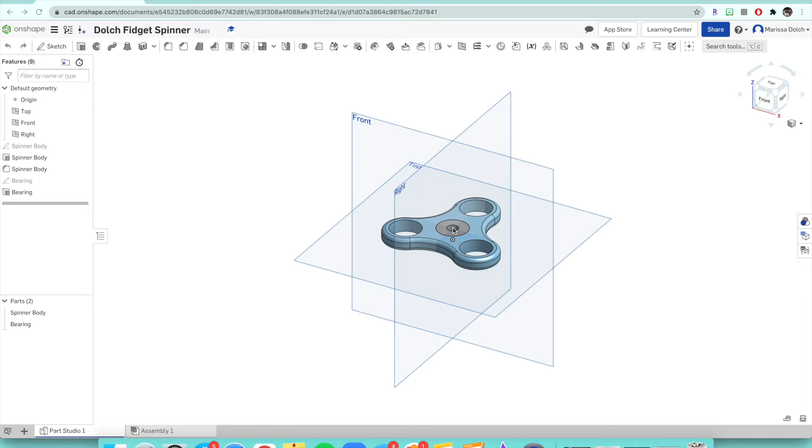So in this video, we are going to make the caps for our fidget spinner. So please make sure if you're coming onto this video that your spinner looks like mine, so you're ready to go to make that cap. So these caps go on top of the bearings through that little hole right there for your fingers to hold on to, right? That's how it spins around in a circle.

You hold on to the top of the cap and it spins because the inside rotates on that bearing right there. So right now we're just going to make one, kind of like how we made our one bearing, because once we get to the other part, to the assembly, we'll just add in another one for the other side of this spinner. So what we're going to do is we got to start with our sketch, right? So same thing as usual.

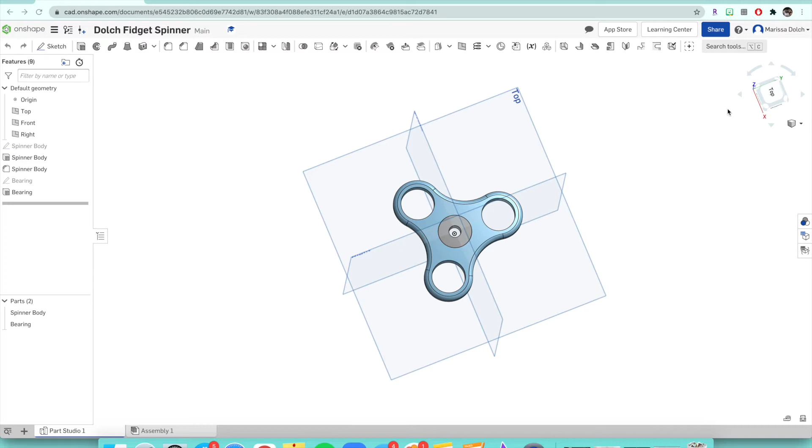We're going to go to the top view. Now you're not going to click add sketch to top view yet. What I want you to do is click on the top of the bearing that we made. So that donut should light up. And that's what we're going to make our sketch on. You know if you clicked it correctly if, after you click on that donut and it lights up and you click sketch, it should say face of bearing, right?

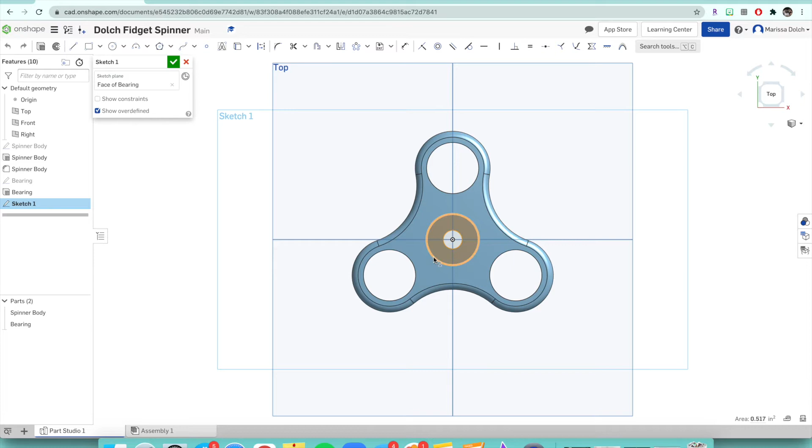So that's why we named everything, so we could make sure everything is how it's supposed to be. So that is where we're making our sketch, on top of the bearing, because the cap goes on top. So we're going to zoom into our bearing here so we can see it a little bit better. And we're going to do the same thing like we did with the bearing. We're going to make two circles.

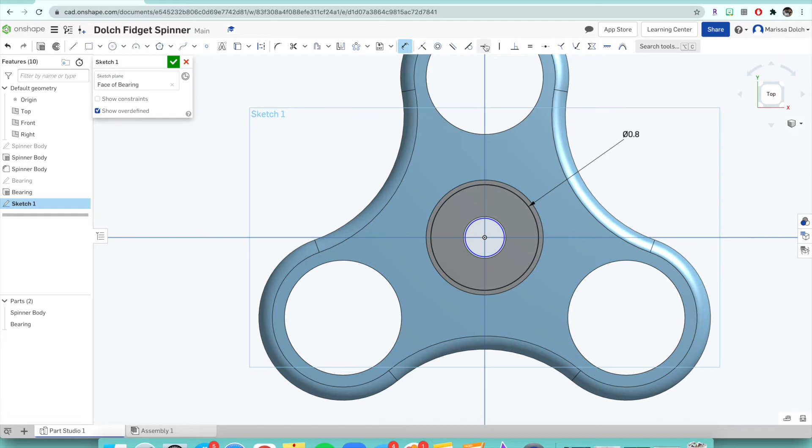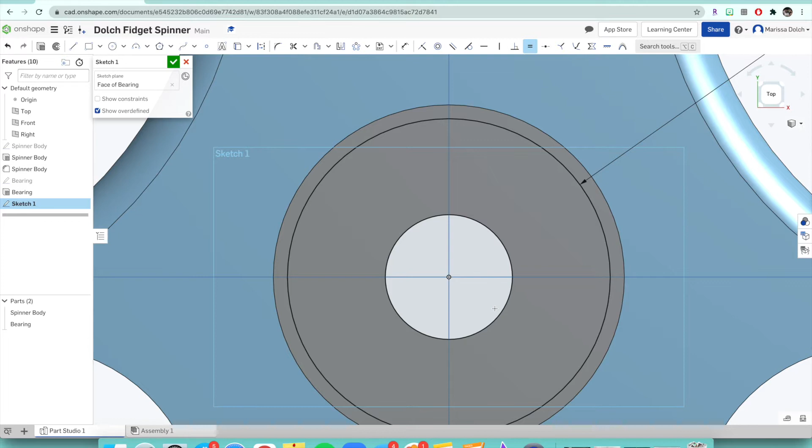We're going to make one circle snap in the center on the outside, another one on the inside, and we're going to change the dimensions of the outer circle to 0.8. So it looks like that. Then for the inner circle, we're going to make that one equal to the black circle of the bearing, right? So that inner bearing circle, we're going to make that equal to our blue circle. All right, so it should disappear because we want it to fit in snugly. So we need to make sure that it vanishes and it looks like this.

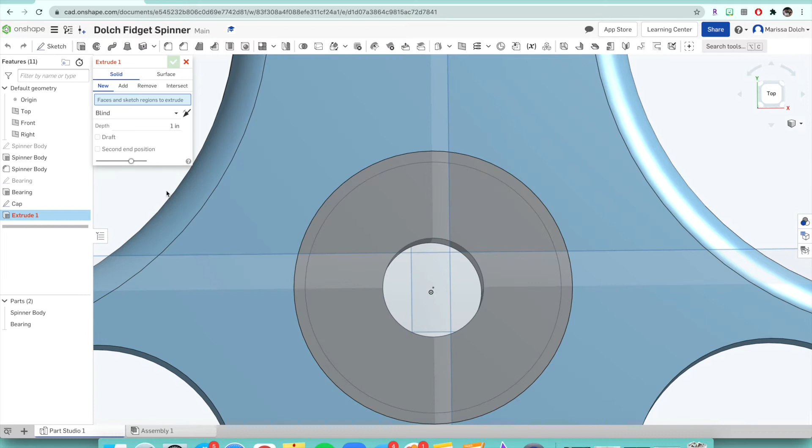So there we go, we have our drawing for our cap, and we're just going to rename this to cap so we know, and we can click that check mark and we're good to go. Then we're going to click the extrude button. So we want to make this 3D. Now, for this extrusion, you want to select the entire cap. I know before we just clicked the donut, right? And we didn't click inside, but now we want this whole entire thing to be solid. So you're also going to click in the middle of that cap there.

And you can see now that it's a solid piece extruding out. So again, we don't want it to look like this. We want to also click in the center of the hole to cover and have a full piece of material that's solid. So now it defaults to add again, right? But like the bearing, we want this as a separate piece. We want this as a new part. So we're going to click new, and it'll change it to a dark blue color. If you don't change it to new, it'll stay gray.

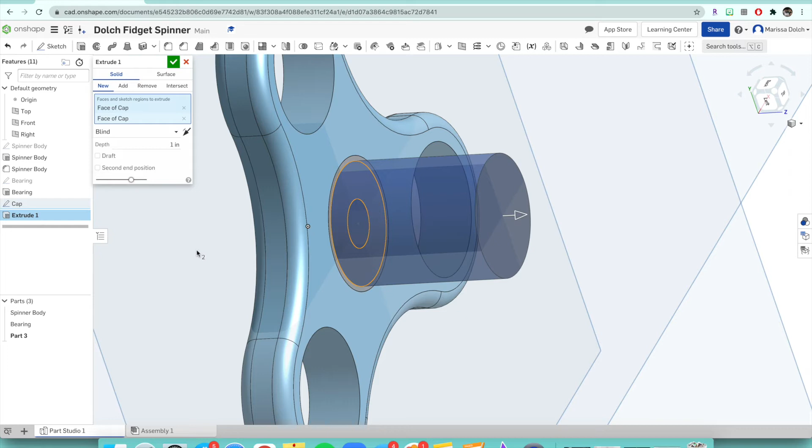We want it to be added on top of that bearing, so that is why we're making it a new part. So now this is sticking out fairly far out of this fidget spinner, so we want to definitely bring that height down, and we're going to bring it down to 0.12. Alright, so that is significantly better, a comfortable height for your finger there. So now we're going to rename this to cap 1 because we have to do 2 extrusions. The first one that we just did was the cap itself, the top part, and the next one we're going to do is the peg.

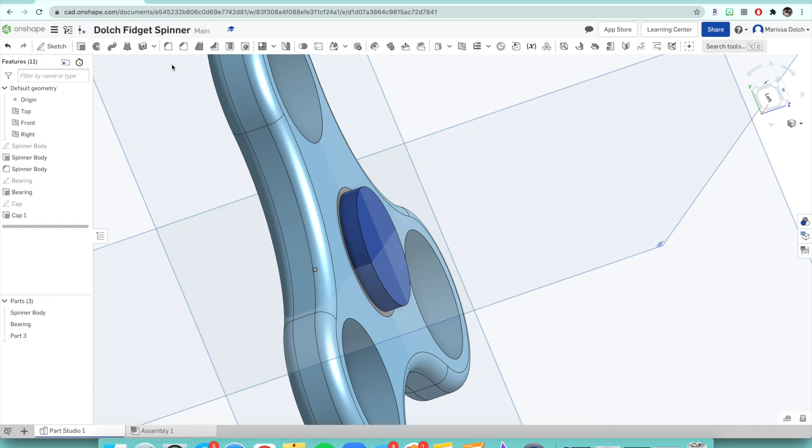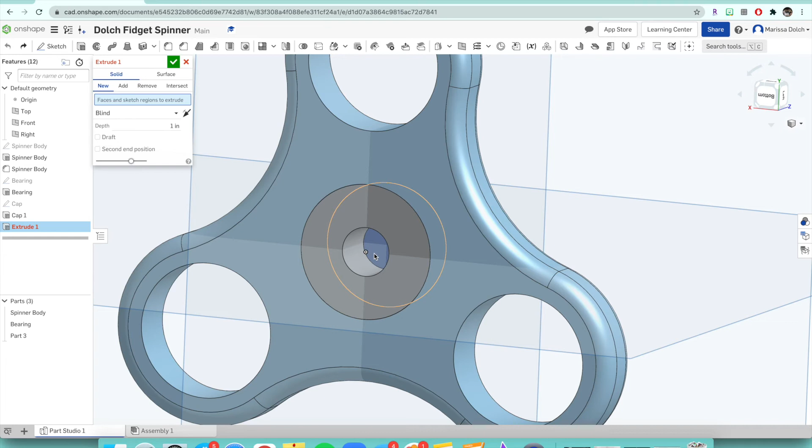So we're going to name this one cap 1, and now we have to make the peg into a different extrusion, because if we did the peg right now, it wouldn't work. It wouldn't add it in the correct spot, so now we have to do another extrusion for the peg that goes onto the inside of the bearing. So we're going to click extrude again. And now, of course, we're just going to click this right here. Oh, that doesn't really work because we want this dark blue dot and I can't really click on it. It just keeps doing that.

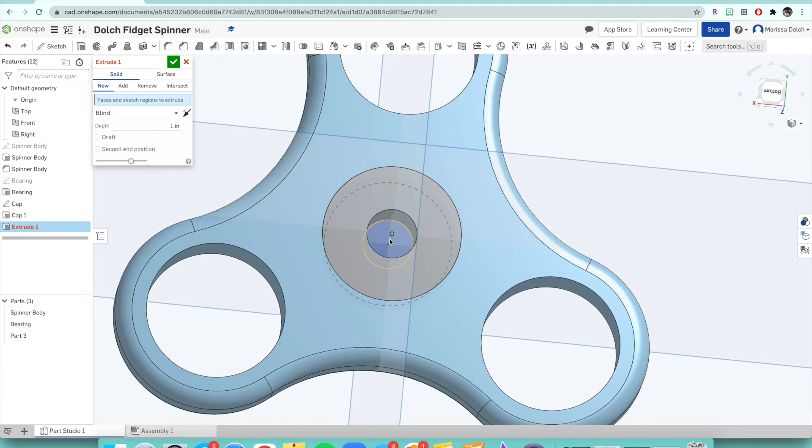So what we have to do to get that blue dot to come out and extrude inwards towards our bearing: right now you'll see on the left side, it says cap, and it's in a light gray color, because right now it's hidden. So we want to click on that eye so we can see it. And now you can click on that blue part and it'll come out, but it's coming out the wrong way. So we definitely have to fix that.

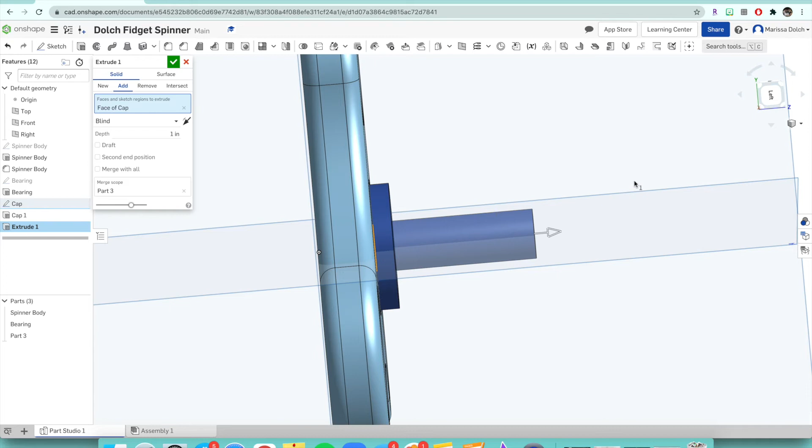To fix that, we just have to change the direction of the arrows. Right now, it's going outside on the top. I want it to go to the bottom, so we're going to click that arrow and it'll go the other way. Now, oh my god, right now it's red, right? Which is kind of scary, but don't worry. We're going to change the depth and it'll fix itself.

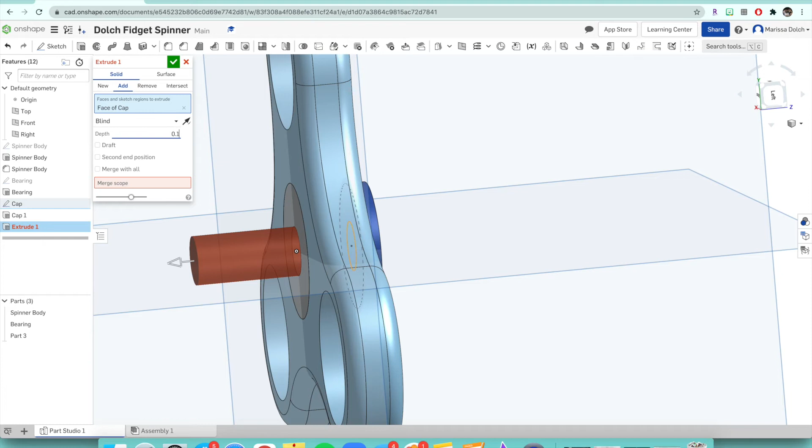So we're going to change this depth to 0.175, click enter, and now it's not red anymore. And it's going halfway through, which you can't really see right now. I'll show you in a couple minutes, but it's going to go halfway through that bearing, so we can put another one on the other side later.

So now the only thing that we want to do is, you'll see here it says new, right? Because that's how we had it for the top of our cap, which we don't want. We want to make it add, because we're adding this as another piece to our cap. Our cap's a whole piece, the peg is not separate. We want the peg to be attached to the top of the cap. So you want to make sure, this is very important, to change it to add before you click anything.

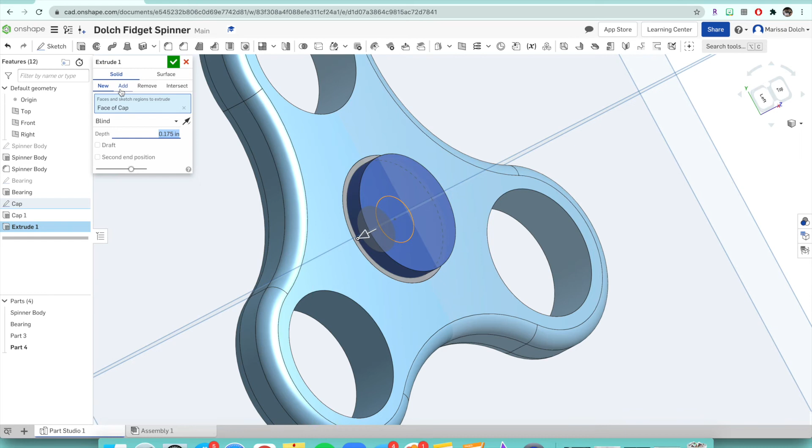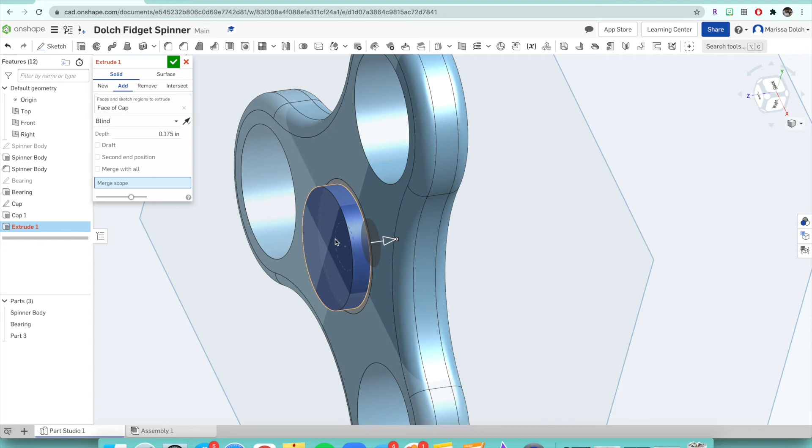Right now it's red again, you'll see our dot is red, kind of concerning, but all that it wants to know is what are you adding it to? What are you adding this peg to? And we're adding it to part 3, which is our cap. Now you can see it also turns blue, it went to part 3. And you can just click the check mark, which I forgot.

We also want to name this, so you just double click, rename, and I'm going to call this cap 2, to distinguish. All right, and it kind of looks like that.

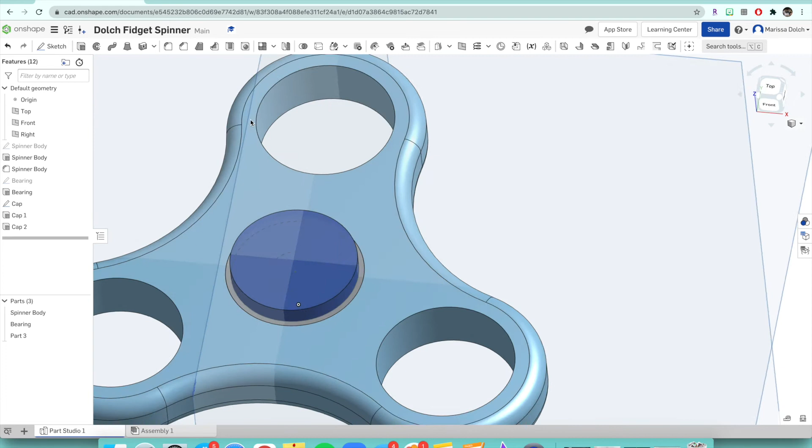Now we want to go back and hide that cap sketch again, since we unhid it to do that extrusion. So we're just going to hide that. And now, let me hide the spinner body and the bearing here.

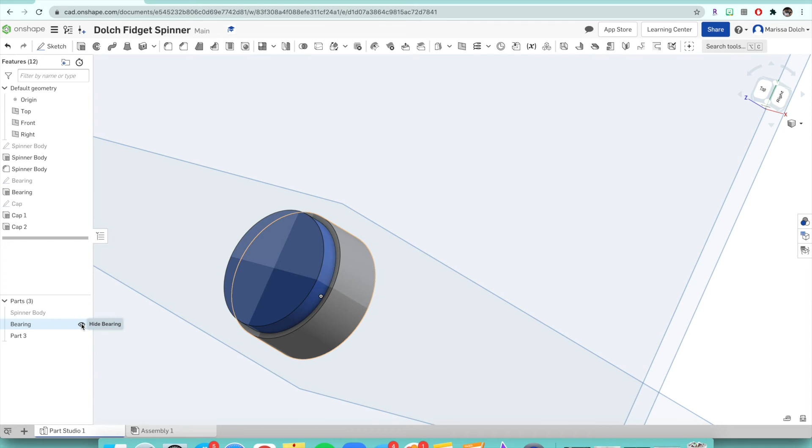So now you could see that part 3, which we'll rename in a second, the peg is going through that bearing halfway. Right, so we did exactly what we were supposed to do.

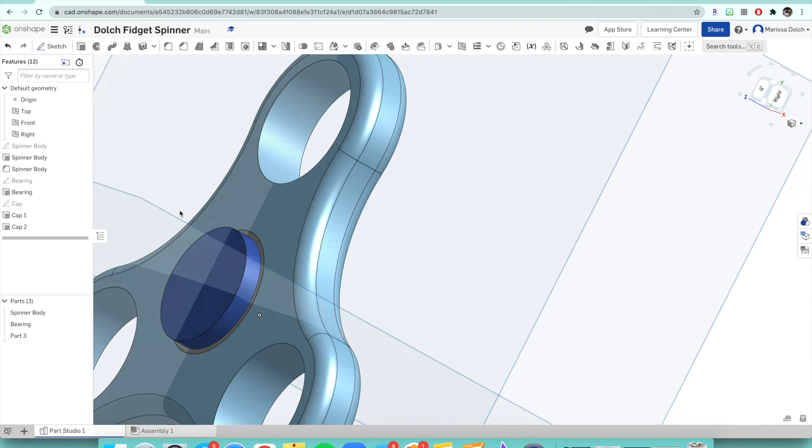So now I'm gonna show all the rest here. And now if we look at the top of the spinner, it's kind of, like I said, even with the body of the spinner, it's rough, right? It's rigid. We want to make sure that when our skin's touching this, it's safe for us to touch and it's comfortable.

So we're going to chamfer this edge to give it a nice smooth edge. So what we're going to do is click on our chamfer button, which is next to the fillet, and we're gonna just click on that edge. Right now, as soon as I clicked on it, it went a little too much, so we're gonna back this up a bit and make it 0.1, click enter, and now it looks pretty good. It definitely looks more like a fidget spinner.

So there is the final product here. So now what we're going to do down here is, we have everything named except part 3, so we got to rename that. So we're going to rename this to cap.

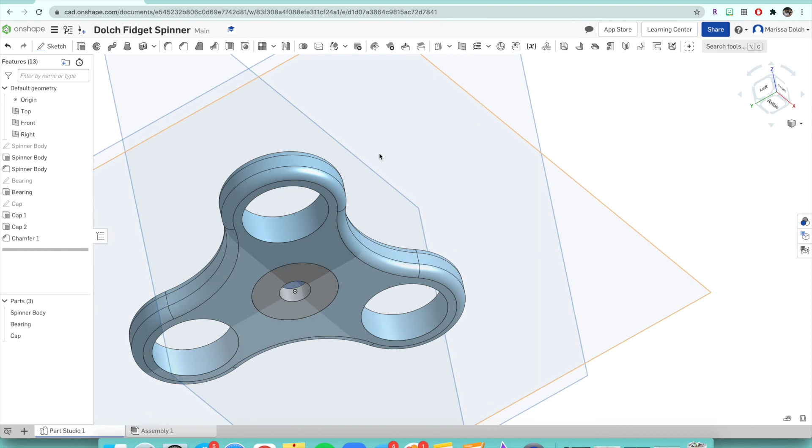And like I said before, we will put another cap on the other side of this just when we get into the assembly. But before we get to the assembly, the last thing that we have to do is change these colors. Of course you could change the color that they have, I do like the colors, blue's my favorite color, but some of you might want to get creative and change the different colors of your spinner body or the metal bearing or the cap. So I'm going to show you how to do that.

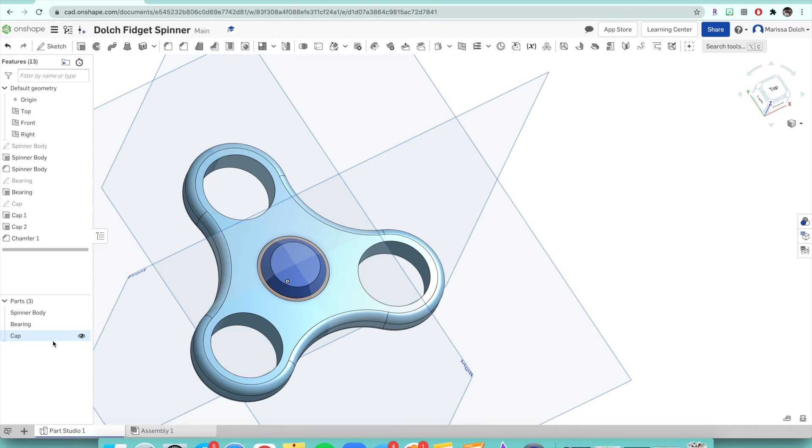So you're going to go to your part section over here, and the first thing I'm going to change the color of is the body. So you're going to right click, and you'll see it's going to say edit appearance. When you click on that, you'll get a whole palette of colors that you could choose from. You could even go to the mixer and do fancy specific colors, which is kind of cool. But I'm just gonna pick a regular one, and I'll pick my favorite color here. This is a nice mint color.

And then same thing for the bearing, but first, if you want everything the same color, what you could do is just like I just did, click bearing and click cap, and everything will turn the exact same color. But I'm gonna be different, and I'm gonna do the bearing and cap 2 totally different colors. So once you have your body good, you want to click that check mark, and then right click on bearing, edit appearance.

And I'm gonna stay, we'll do like a grayish color for the bearing, and then for the cap, let's see, maybe I'll do a darker one in the family like that. There we go. And now I have edited my appearance of my fidget spinner, which is kind of awesome.

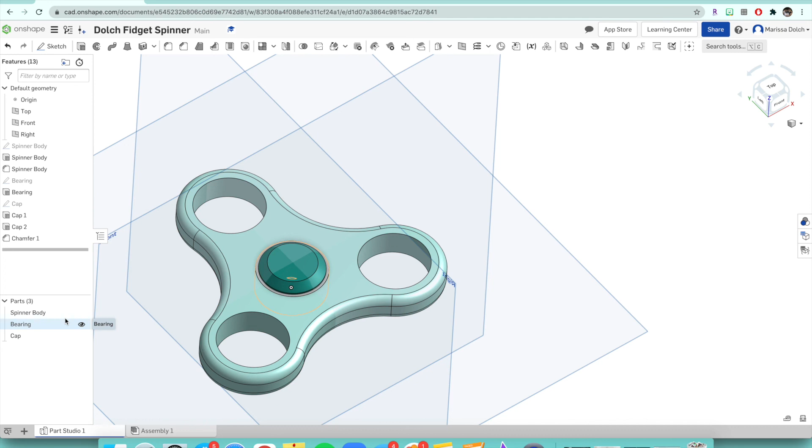So you definitely want to make sure that you do all of this and change your appearance before we go into assembly. So it's all done, it's all ready to go, and so we can get this thing moving and animated. So make sure you get to this part before you go on to the next video, where I am going to show you how to assemble this together and animate it.